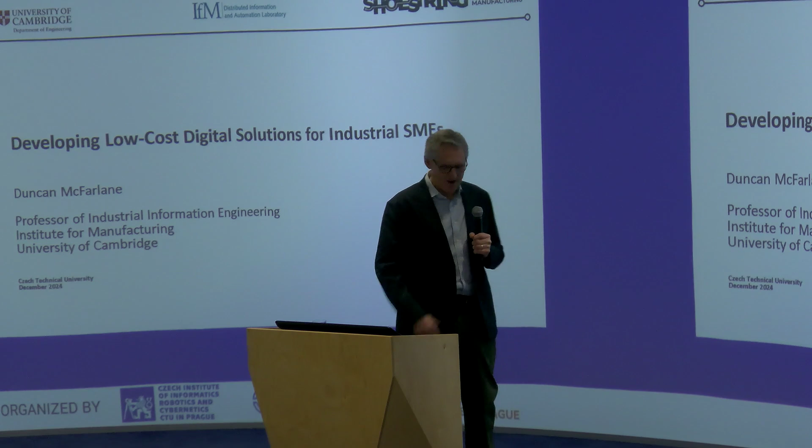So I need to use this, do I? Okay, right. Because I have a very loud voice anyway, but anyway, I would do this. In case I break it, I want to sing some songs later on anyway.

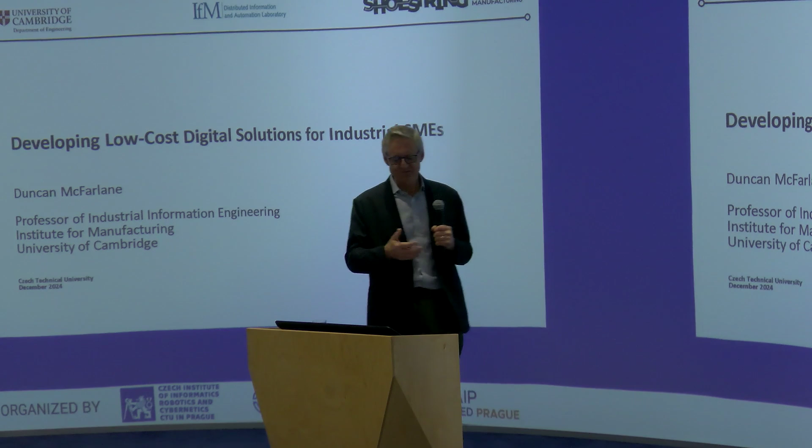So thank you very much, Vlad, and I should say I've really enjoyed my visit, and thank you to everyone that I spent time with yesterday. It was really great to see the facility that's developed. Fantastic. And as Vlad said, we've had connections for a long time now, so it's really good to be here after quite a big gap.

So today I'm going to be talking about something a little bit different to what we've been discussing in the last 2 days, and it's some work that I've been involved in since 2017, particularly, as it says here, looking at the issues and challenges that very small companies face in trying to become a bit more digital than they are already. The first thing to say is there have been a lot of people involved in this work, and I should say it's called Digital Manufacturing on a Shoestring, the kind of catch title.

Maybe 30 or 40 people over the last 7 or 8 years have been involved one way or another, so I acknowledge their inputs. This is really just a summary of that. So what I'm going to do is talk a little bit about the background to the small companies and some of the ideas behind what we mean by low-cost digital solutions.

And then I'm going to focus on 3 key things we've had to work on. One is helping organizations to specify solutions. The second is how to design low-cost solutions systematically, and then how to deploy them cheaply. And then I'll wrap up. In theory, this is about a 45-minute talk. Sometimes I go a little bit longer, and I'm sorry.

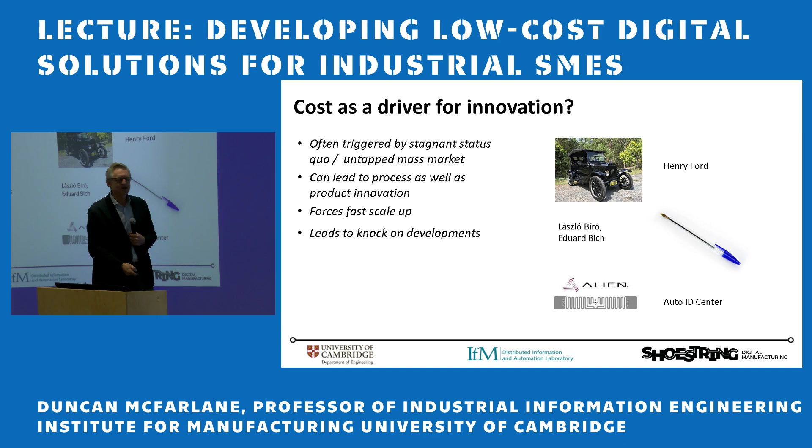I'm not talking about any of those today. I'm talking about low-cost industrial solutions.

This project, or this whole activity, began with a student who came to see me in 2017. He said, I have a 6-week project, I want to solve the world's food waste problems. I said, so often in Cambridge our students have quite big ambitions, maybe you can't do that in 6 weeks. He said, also, I want to come up with a smart fridge. I kind of laughed.

But we were working with Tesco at the time, a big supermarket chain in the UK, and the student said, I want to have a go. In 6 weeks he nearly built a smart fridge. He took the GoPro camera off his bike helmet, got a Raspberry Pi microcomputer from a friend, took some software from an MIT website, and got some wiring and sensors from our lab. His aim was to monitor the level of milk in the milk bottle and some other contents as well.

I thought this project should be a 2-year project—that was the way we did it then—so I was quite shocked. He didn't finish it exactly, but the next month he came back and finished it.

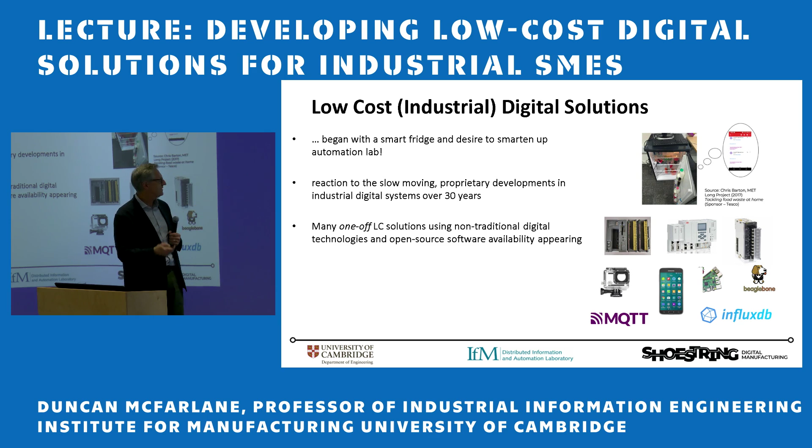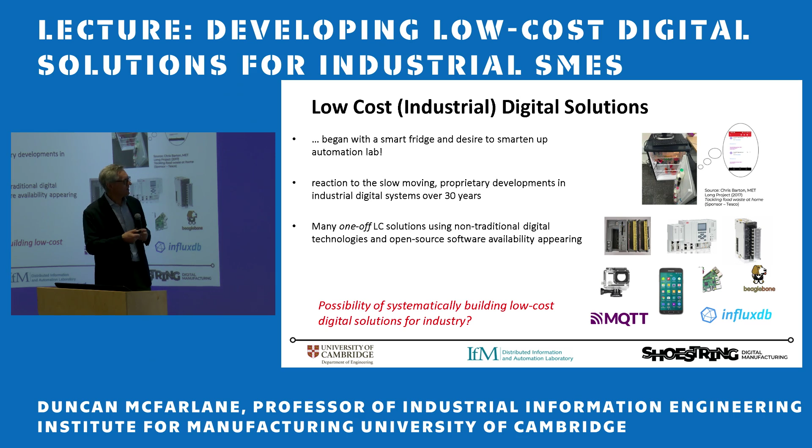This was back in the mid-2010s, which was also when Industry 4 was evolving. So we started to think about whether we could take these sorts of ideas but take a more systematic approach to build low-cost solutions for industry in some ways. That was the first thing we looked at.

The second thing that happened was Industry 4. I went to a lot of industrial workshops in the UK and in Australasia. I had a very interesting workshop once in Melbourne where I was looking at a really impressive proposal from Siemens for a top-to-bottom IT infrastructure. The guy standing next to me—I asked, is this interesting, are you a manufacturer? He said, I am.

Is this interesting for you? He said it could be, but I can tell you I'll never have it because it's too expensive and it's a big solution and my company has small problems. It turned out his company had 30 or 40 people. They wanted to do digital deployments, but some of the offerings that were coming through just didn't match what they needed.

Depending on where you are, in Europe 250 is the limit for SMEs, in North America it's 500. But here's the really interesting fact: most manufacturers in the world, 99%, are SMEs, no matter how you measure it. There are about 368 million SMEs in the world, and the estimate is maybe 30 to 40 million of those are manufacturing SMEs. So that's a lot of companies.

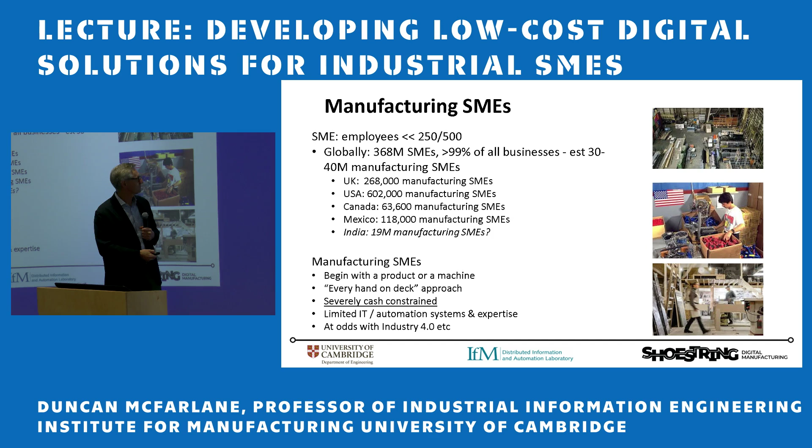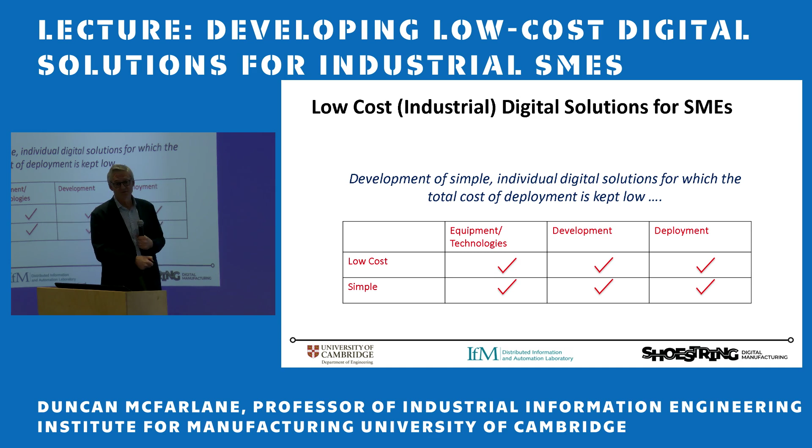So when we started to think about what we could do with small companies, the message we got very clearly was: we're interested as long as you build simple, low-cost solutions for which the whole cost for us is very low. And that didn't just mean the equipment, but the development and the deployment too. So everything had to be kept low - that was our challenge point.

In the first part of our project, back when it began in 2018, we started talking in more detail to small companies, and maybe within the first year we talked in one way or another to about 300 or 400 small companies. Not only did they have not much money, when you asked, do you want to be digital, they said yes, but we have to do it for the problems we've got, not for what you're trying to give us. They didn't know what solutions were available for their problems. They didn't have the capabilities to understand the solutions. They didn't have dedicated time, and they were really worried about key staff leaving in the future. That was a big challenge.

So we had to put together an approach that not only technically developed solutions, but actually did a lot more. I'm going to talk about the whole problem, not just the technical part, in the next sections - in three parts: requirements, design, and deployment. So not only do we have to design, but how do we effectively deploy the solutions?

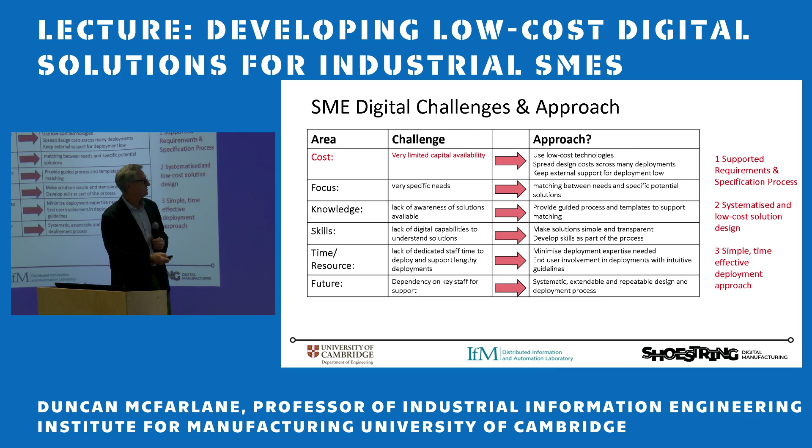Before I go into that detail, I just want to mention this shoestring project. Sorry, am I blocking your view? No, I'm not. Okay, is this the best place to stand? Maybe in the middle - that way I've got the column here.

Okay, perfect. So we came up with this idea called Shoestring. Anyone that's as old as me - and not many of you are, maybe Vlad is as old as me - there used to be something called a Shoestring travel guide to travel in Europe, and it told you how to be very cheap but still have a good time traveling around Europe.

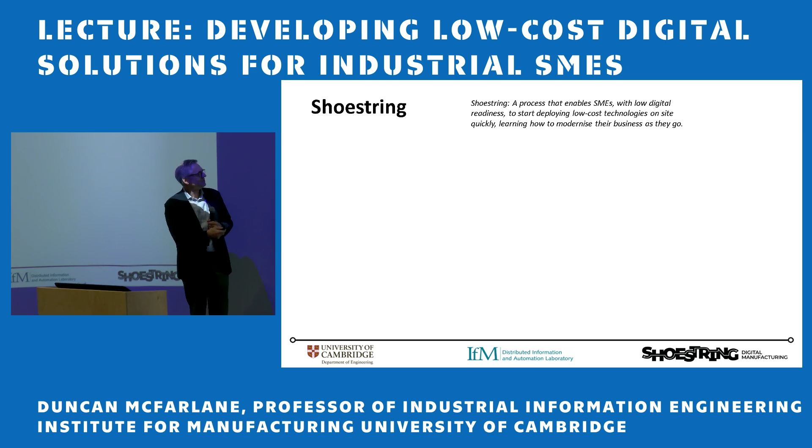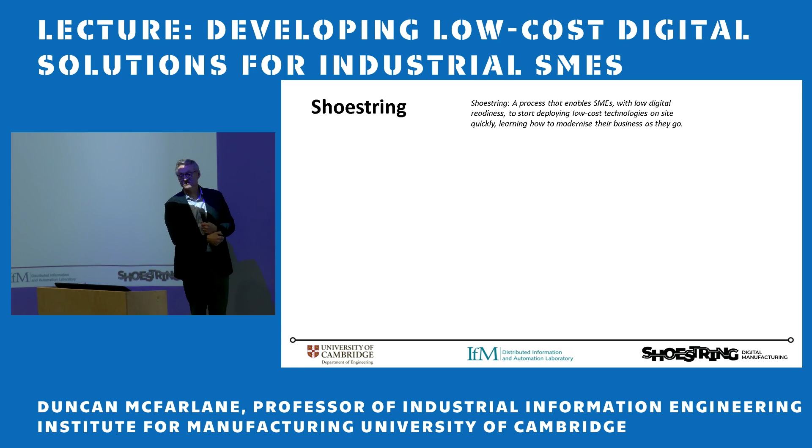And so we used that as our title. It was the shoestring. Shoestring is a process, not a solution. It's a process that generates solutions for integrating low-cost technologies to address the needs of small companies.

We began it with a research project, and that ran for 3 years, 3.5 years. It ran all the way through COVID, which is important. During that project, we had 50 partners, and they said, well, what happens when this project ends? We thought we would have 2 test beds, but we ended up with 20 trials in companies.

So we needed a system to take these outputs, which was these low-cost solutions, a simple architecture, but also ways of helping companies understand their needs and training the companies. And we built that into a business activity.

So we have within the Institute for Manufacturing in Cambridge a business unit that manages not only our research programs, but also we run regional programs in different parts of the world, advises small companies, and also works with apprentice and training organisations. So that's what the shoestring program has done.

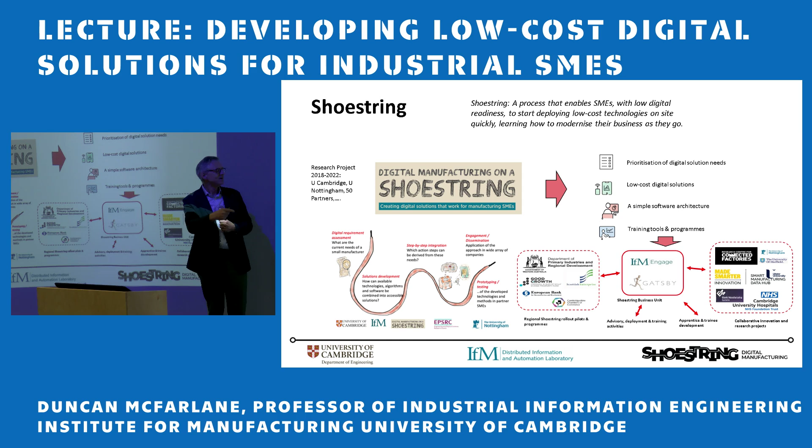I'll come back to where we've got to at the very end, but I'm now going to go into the processes we've used. Firstly, the companies we talked to said, well, we kind of know what our needs or issues are. We don't know how digital solutions address them.

If I go back to that chart I put up before, the items in red were really the key things we had to achieve in the needs and specification area before we could even begin to design a solution, because we began not knowing what small companies needed. We thought we did, but we were kind of wrong and right.

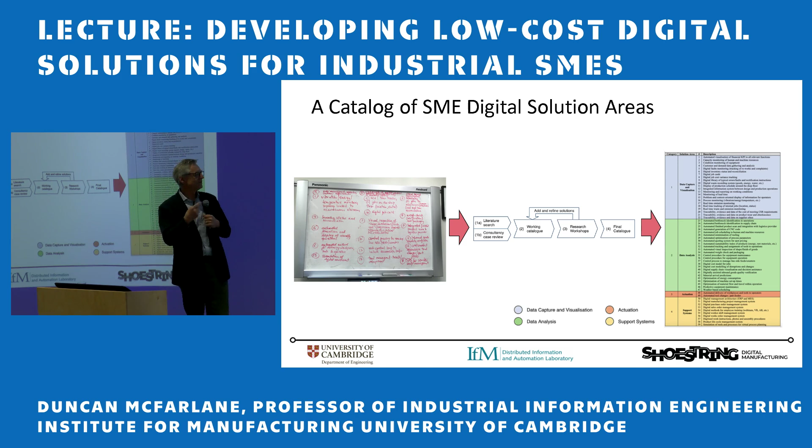And in the end, we came up with what we called a catalogue, which identified the top 40 to 50 solutions that all small companies asked for over and over again. We did this through a series of workshops which we ran across the first year of our program. That catalogue included some solutions that we didn't believe were suitable for low cost.

So on the right-hand side there, all the many things - if you want something that will run 24 hours a day on a safety critical process and needs to be fully automated, then don't try to do it with a low-cost solution. I think we all know that.

So on the other hand, what we found is many of the solutions in that catalogue were actually compatible with using some low-cost technologies, mainly because it didn't matter if it failed from time to time. It allowed a company to get started on trying some digital ideas.

So for example, I'll just show you a quick video of one of the companies that got involved. What's interesting in what he says is many companies had one machine that was really well automated, but all around that machine, there was manual processes. So a lot of the shoestring work began focusing on the manual processes around the main production operations.

Within our business, it's really important to look at manufacturing digitalisation because there's only so far you can go in reducing machining times and process times, and it's a lot of these periphery events before and after where we can show some greater gains and maintain a leading edge on cost effectiveness within businesses.

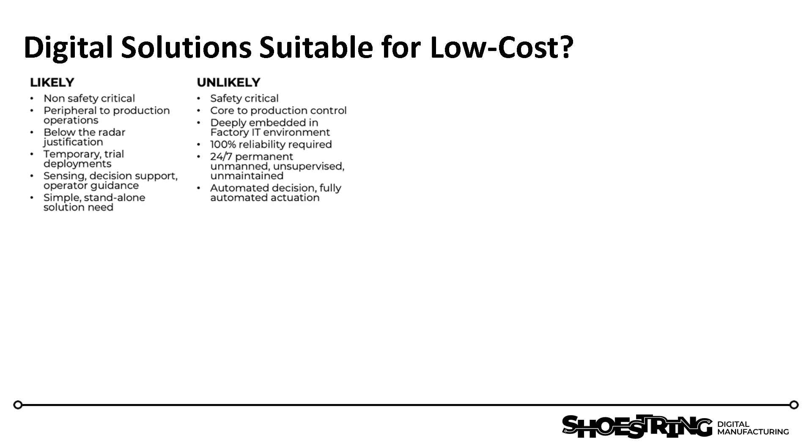A lot of... I'm going to leave. So yeah, so I mean, you get that message.

He was one of the initial partners in the program, and what they were after was to try a whole lot of things in their manufacturing environment around their production systems that they hadn't had a chance to try before because the solutions were too expensive.

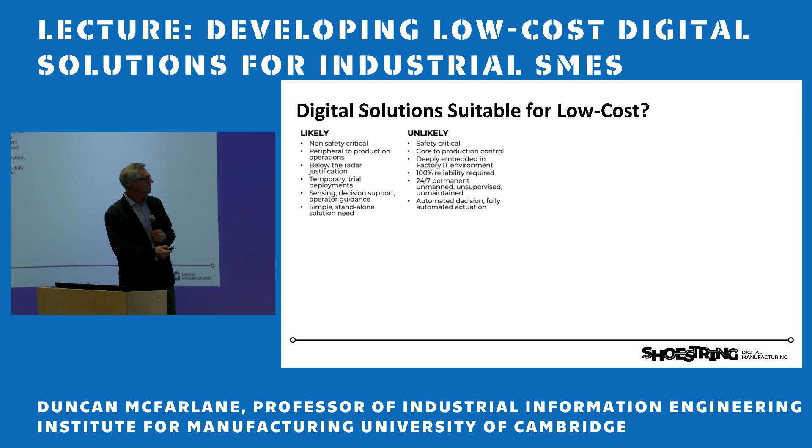We had many companies saying we have data systems around our factory that we have to go and manually check all the time, like a light stack. We have these lights that say red when the machine is not operating, green when it is operating, but we don't have any digital record of that. So the solution there was to point a camera and just look at the colour of the lights.

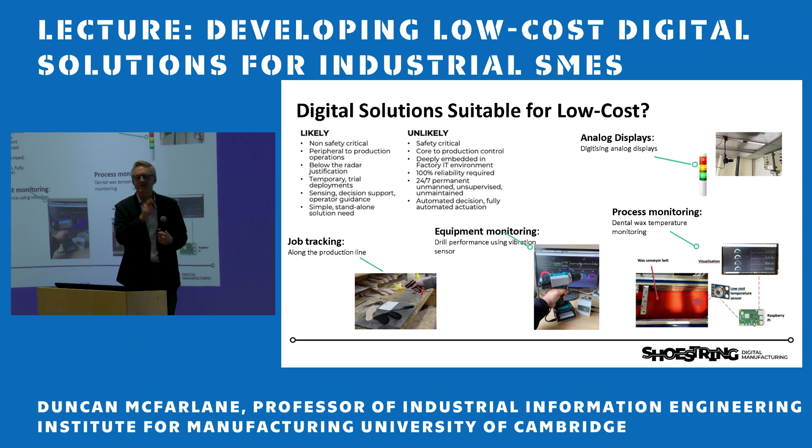The second thing companies talked about was that they have to build business cases. Our boss says you need to talk about a business case for making any investment, and we knew that is often a prohibitive issue for a small company.

So we developed a really simple approach which basically identified basic benefit areas possible, and in a short workshop of about 15 to 20 minutes with the company, identified where they were going to get benefits. They would use that instead of a business case in their process.

We then went back later and did some auditing of that process. What we generally found is any benefit they identified, they got, but there were also many others that they observed and didn't actually anticipate. This is very typical for most digital solutions actually—there are many more benefits than those that are actually quantified at the beginning.

In fact, we've done quite a lot of work on something called value of information, some of our more academic work connected to this, and we've come up with methodologies you can broadly use for coming up with a value in terms of impact on the business of digital solutions.

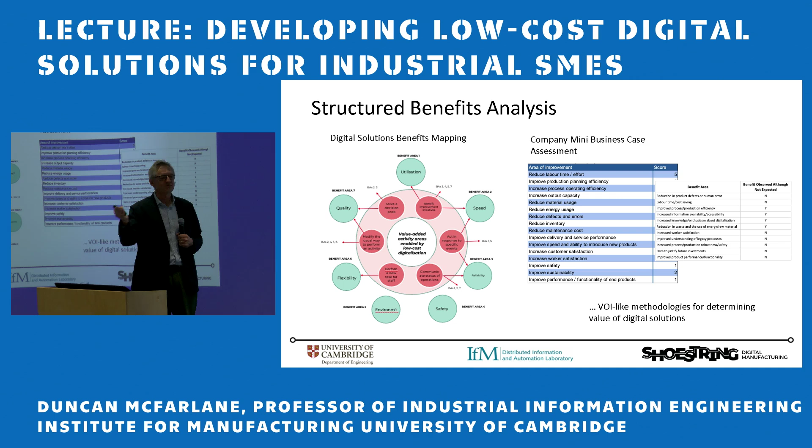Finally, one of the key things we found is that many small companies have people that understand their processes really well, but understand digital systems very poorly. And yet what we needed was to help them build a solution that is going to work.

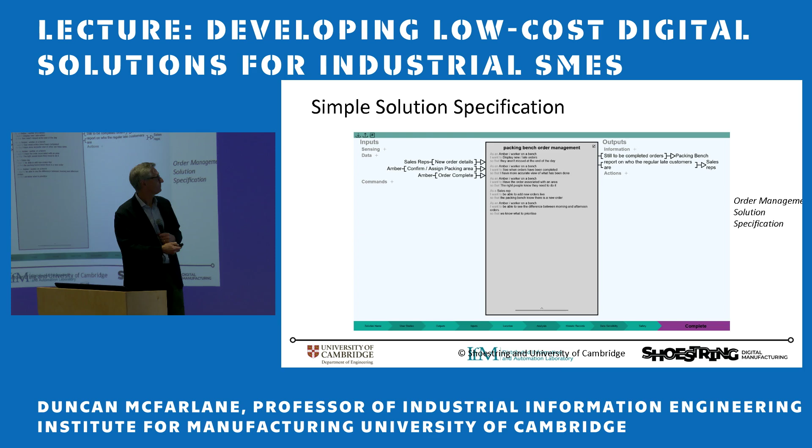So we developed a simple methodology for capturing their verbal requirements in a specification structure. This structured specification is designed so that it can be relatively simply turned into a technical spec.

So that gives you a sense of the way we had to build a structured support for a small company. Note, I haven't talked about any solution development yet—this was everything that needed to be done to help a small company get to the point of identifying what solution they needed. Quite heavy work, actually.

But we've now reduced this down to a 1 to 2 hour session with the company, and we're moving to a point where companies will be able to do it themselves, or perhaps with a local facilitator—shortlisting the solutions they're interested in, prioritising the ones that will have the best benefit, identifying the features for their solution, and then building this formalised specification.

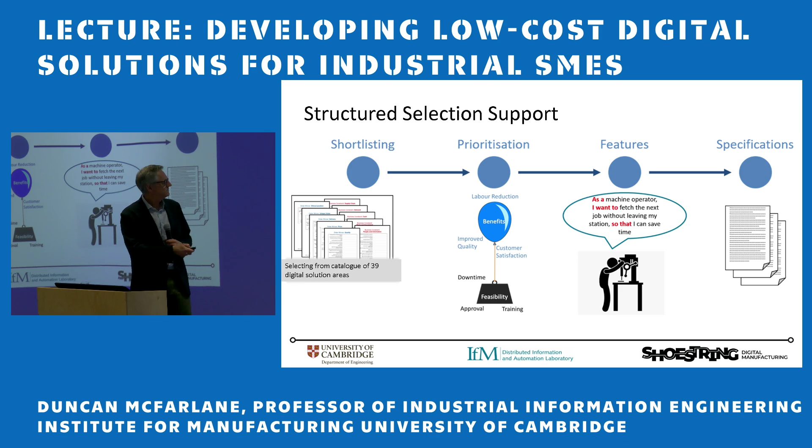That leads to the next part, which is, once we know the solution, how do we design a systematic low-cost digital solution for a company? Cost has been a dominant challenge all the way through this. So here, if I go back to the original set of company challenges, this is about how do we use low-cost technologies, how do we make solutions simple and transparent, because people said, I want to understand what you're doing, and there's a reason for that when we get to deployments. We wanted to involve the end users in the deployment, and it needed to be systematic, extendable, and repeatable. So I'll talk about that next.

So way back early on in the process, having come from many years of working with modular reconfigurable systems, I proposed a solution architecture for these low-cost solutions. And the logic behind it was something like this.

We have all off-the-shelf low-cost technologies, and although we can identify them at any given time, they're always changing. So for example, Raspberry Pi, who we work very closely with, they bring out a new model every week, and I think they're aiming to do more. So how do we keep pace with this?

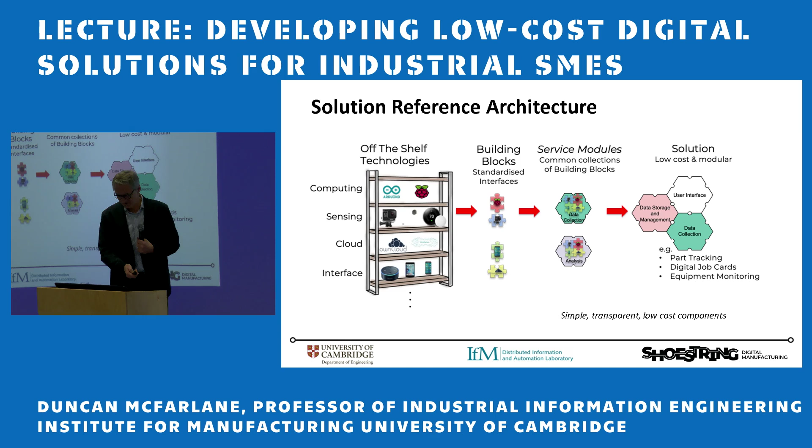And in fact, we more or less have kept with that architecture since the beginning. One of the reasons for keeping with it is that we also did a survey of different architectures available for building individual digital solutions. We're all familiar with many, many papers on reference architectures for manufacturing systems. We reviewed, I think, 80 of them and found that there were only 3 to 4 that actually addressed the building of one solution as opposed to the enterprise operations.

I won't go into great details, but we did a quite extensive study with 3 candidates: an early Holonic one, conceptual architecture using the Erlang programming language, and Web of Things, which is an emerging approach to web-based object integration. We weren't aiming to prove that shoestring architecture was a great architecture, but simply that against some other candidates, it performed fine.

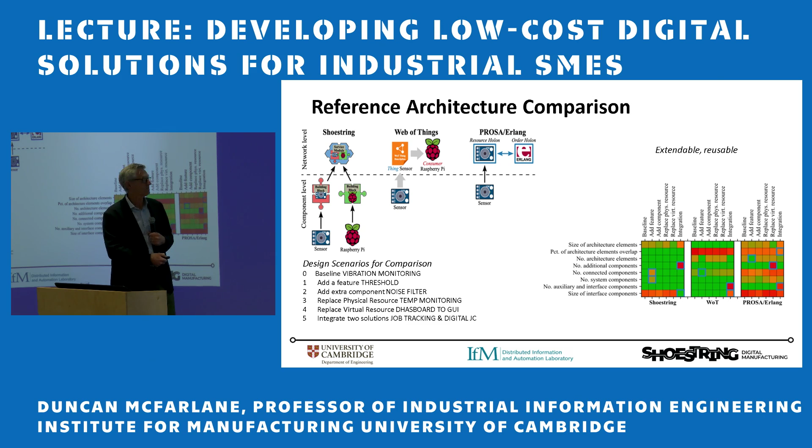And these candidates, it wasn't a particularly fair comparison. These weren't particularly designed to deal with the low-cost challenges the shoestring deals with. But anyway, in that analysis, shoestring came out with good results in doing many extensions and reuse and integration tasks. So we feel kind of comfortable that we've got an architecture that is sensible.

We then put together a design approach. And our idea with this design approach, as you'll see at the end, was that in the future we don't want to be building the designs ourselves. Someone else will do them, or they'll be done automatically.

This is familiar, I think many people familiar with digital systems design will understand the V-curve. So specifications down the left-hand side, and then building and construction up the right-hand side. And in the middle for us, a key issue that is not always an issue elsewhere, is we always need to identify the right base technologies at the time, the lowest cost options.

So to make this systematic, we've built a series of catalogues that I talked about earlier and templates for doing designs so that other people can be doing these designs as easily as we do. One of the things we're working on right now, and generative AI has made a lot easier, is a low-cost technology classification method.

So the way it works, and I'll go through it quite quickly, is that we start with that user specification, and we have a methodology for turning that into a more standardized solution specification method. So we capture typical things like information sources, outputs, which data we need to make use of, which physical operations do we need to interface to, and sometimes not at all.

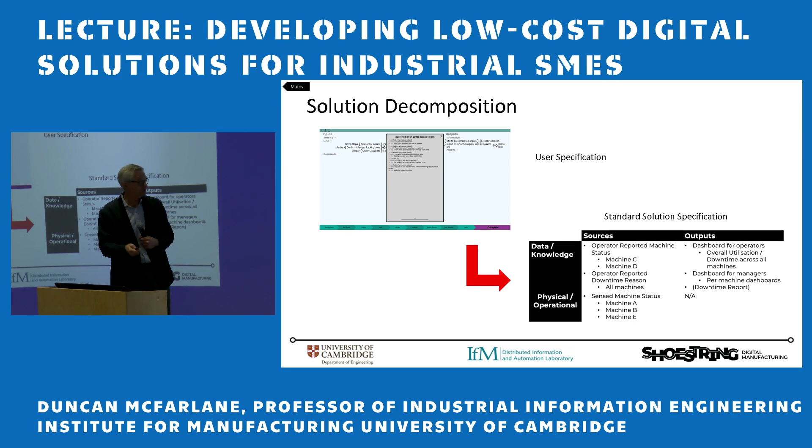And then we decompose that into the service modules I talked about before. Actually what we found is that if you think about everything we do in a digital system, it normally comes down to one of 7 types of operations: gathering, sensing, analysing, recording and storing, deciding, reporting and actuation. So whereas we began thinking we might need to develop many service modules, in fact we found that with 7 basic templates, we can build any solution.

I don't think that's revolutionary. That's quite obvious when you look at the names. And we do have variations within those different service modules, but every solution we've built so far has been built with just these 7 elements.

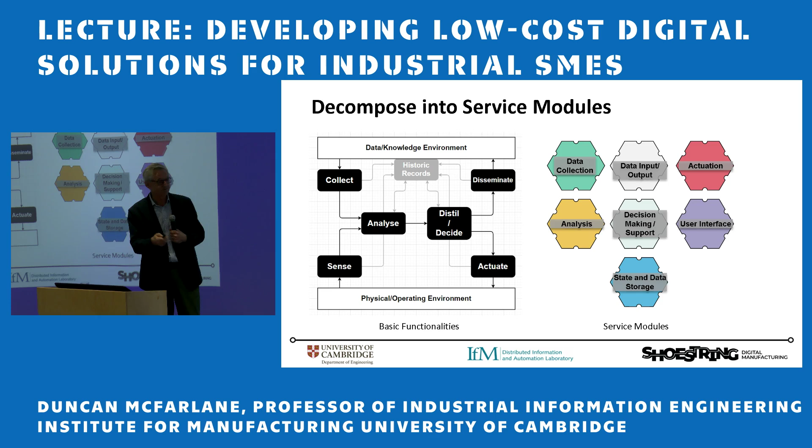So within those service modules, they obviously have to get decomposed into building blocks. And the building blocks would either be hardware building blocks or software building blocks, and in fact, sometimes hybrid building blocks where we have a mixture of hardware and software. But I was talking to people about standardizing interfaces yesterday in some of our discussions.

And this is what we're trying to do here, is to come up with a limited set of power, signal, comms interfaces in hardware, and then communication protocols, message structures, data formats, etc., and ontological organisation for data, in order that if we have our building blocks complying with these specifications, these interface standards, we can always connect them together.

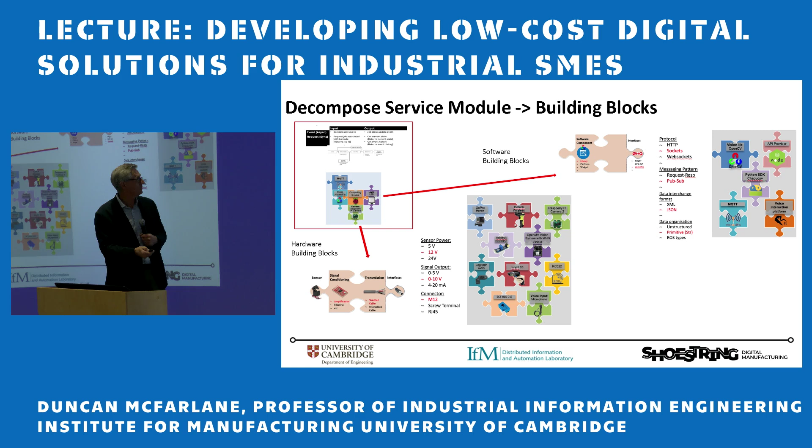So we're making some progress there. It's still, we're certainly still not there with the building blocks. This is the hardest bit. Our service modules are quite mature, but these still need some more work.

And then, as I mentioned, one of the current things we're looking at a lot more now, we began 5 years ago, and it was almost impossible. We were trying to understand how to explore available information sources to classify types of building blocks, or types of technologies that supported our building blocks. I'm sorry, this is not easy to read.

So, we've got our actuation elements there, our sensing elements here, our user interface elements, etc. Actually, they're listed, all listed along the side here. So these are our classifications of the building block types and the type of technologies that we might want to use inside them. This is not a comprehensive list, but this captures some of the early stuff we were starting to build.

And you can zoom in and just see the data collection elements there. So vision systems, sensing systems, etc. Much bigger lists available now.

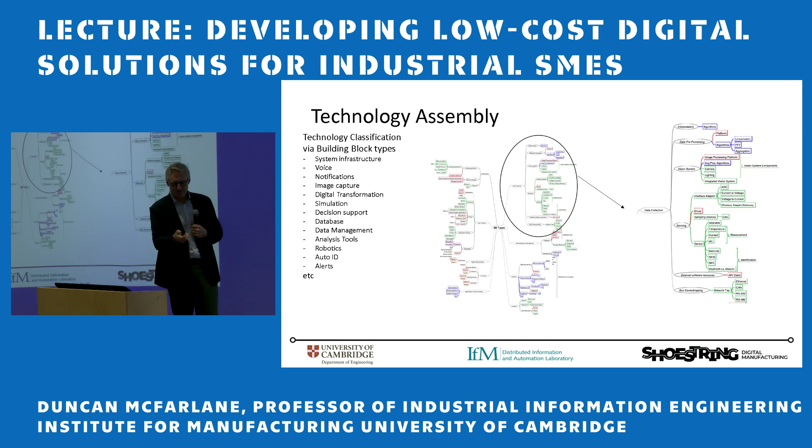So once with the base technologies, we then build our building blocks and integrate those building blocks within these service modules, and then finally aggregate the service modules to form a solution.

So this is an instance. In fact, if I have time, I'll show you a short video of this system. Perhaps I won't have time, actually. But one of the early developments we did was with a company that made dental wax.

They had no automated system for gathering temperature measurement, which meant that they had to walk around and check temperatures of their dental wax all the time, which was critical if you were going to make a mould of someone's teeth.

Anyway, that solution was developed during COVID, so we never went there. We did it all over the phone, and they actually did the deployment themselves.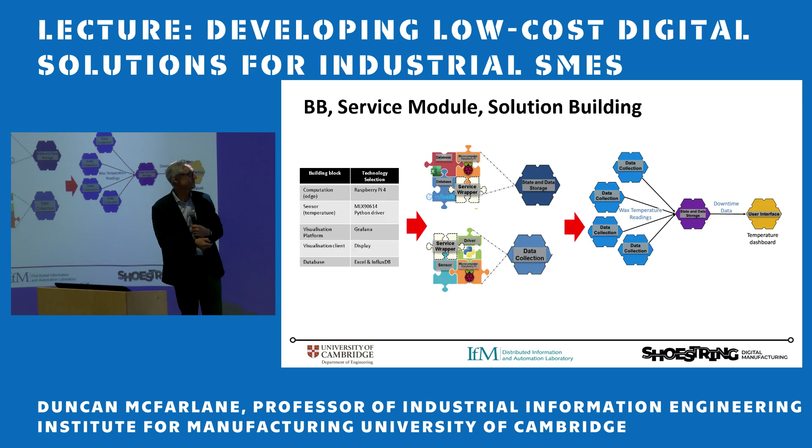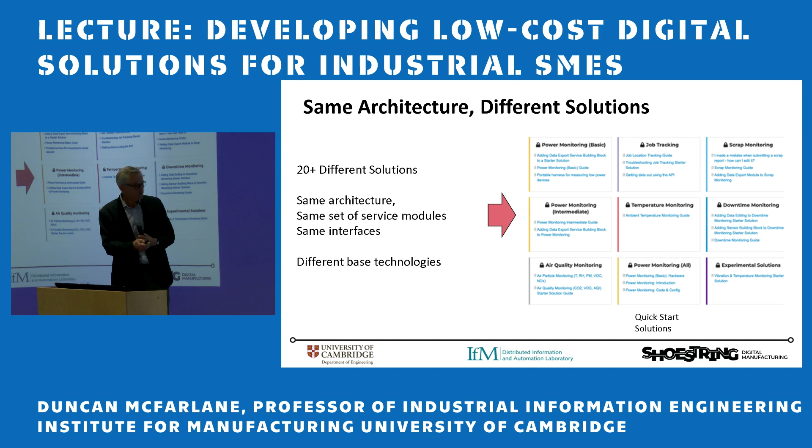So where we've got to is we've developed this architecture, and we've developed 20 different solution types, lots of variants within those, using the same architecture, the same service modules, and the same interfaces, but in many cases, different base technologies. On our website, we're actually selling simple solutions for some of the most commonly requested problems, like job tracking I mentioned before, temperature monitoring, monitoring scrap levels, downtime monitoring on equipment, power monitoring. So these have all been built with the same solution architecture.

And where the design work is going now, as you might have guessed, is how do we do this in an entirely automated manner, or at least in a manner that someone with no expertise can build their own solution, just simply by moving jigsaw pieces around. And this is an extract from some work we did using a package called Blockly for automating the code generation for the building blocks.

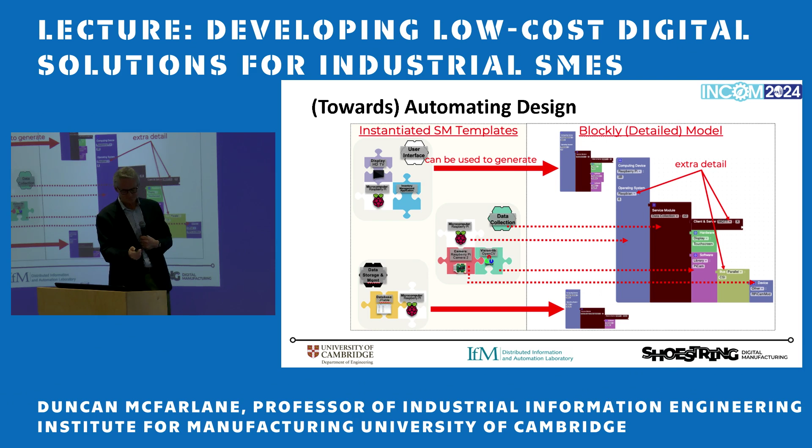So that's a quick description of the design process. The final element, though, is that once we built the designs, we realised if you want to keep it very low cost, you can't afford to spend much time with a company doing a deployment. Perhaps you can afford 1 hour of expert time helping the company deploy. If you think about how many solutions need more than 1 hour, you can see that's quite a big challenge. So we've done a lot of things to try to reduce the amount of effort and improve the local support available for developing.

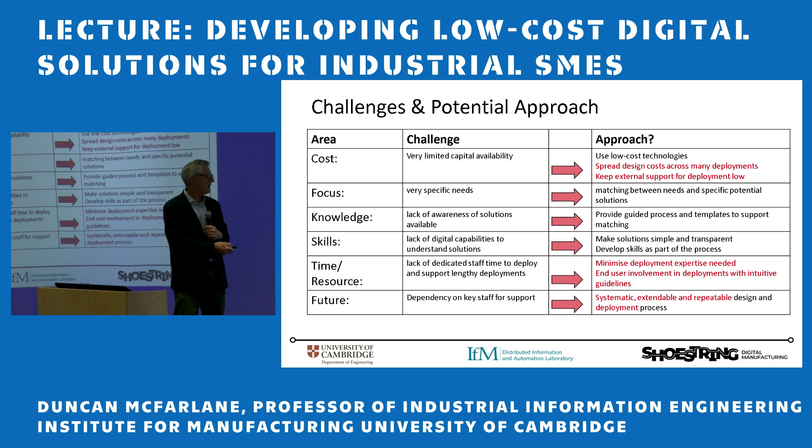This is about some of these issues. To keep the price down, we need to spread the cost of designs across many deployments. We want to keep the support low, minimise expertise use, and—this was really interesting—get the end users involved in building their own solutions, which turns out to address another major issue small companies have: skill development. And make the solution systematic and extendable.

So what that said to us was, we may not be able to solve every small company's needs, but if you could build the top 15 and find an easy way to deploy them, you could be solving many small companies' needs. That's the difference—we had to get away from the idea of solving every small company's personal problems, and instead find the problems that most small companies have. We've now involved probably more than 500 companies in understanding these priorities.

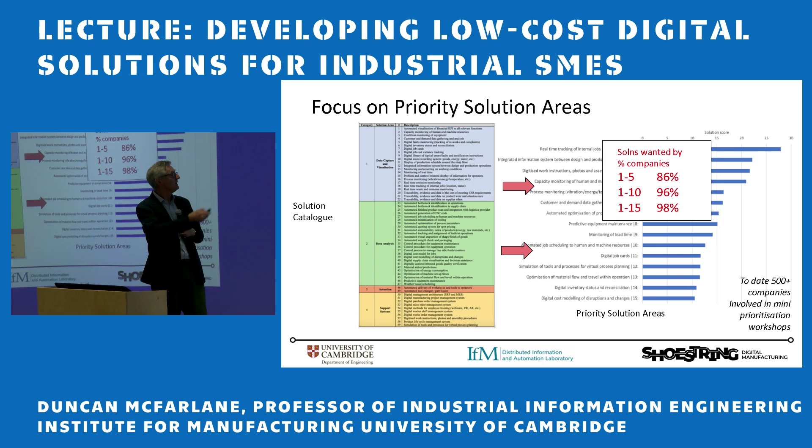So one of the things we realised is that we had to come up with ways to help companies deploy solutions themselves, without having to be on the phone or in the factory. We had to develop a systematic deployment process. We built a community forum. We built guidelines for self-start programs so companies could get themselves going, and they could actually get a mentor and work in a group to do that collectively.

As I mentioned before, we also built really simple starter solutions—you could get a kit sent to you in the mail, follow 10 steps, and have the solution running. Clearly we're not automating a big production process, but for something like scrap monitoring, you could set up your own solution and have it running quite quickly.

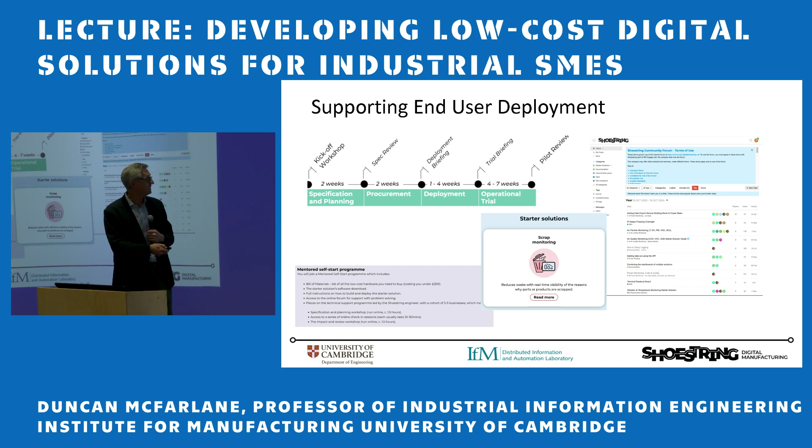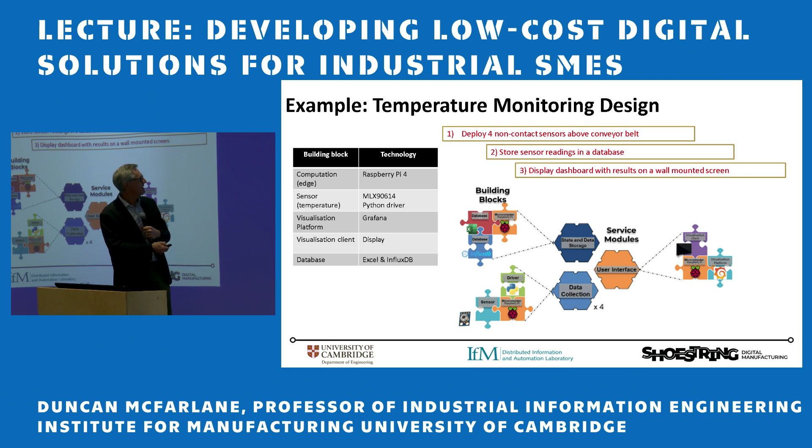I'm going to jump across to this example of the temperature monitoring system. With that system, the production supervisor in the factory deployed it, and we simply provided support over the phone. The production manager was the guy who rang us to start with and asked if we could help him.

So actually, we were still inefficient—we probably made 10 to 20 phone calls with the company, but a lot of the time now we can do the solution deployment in 2 phone calls. We'd like to get even lower. It had significant benefits for the company in the area they wanted, quality control. But also, they started using the temperature system with a simple dashboard to diagnose other problems in the factory, which they hadn't anticipated being able to do.

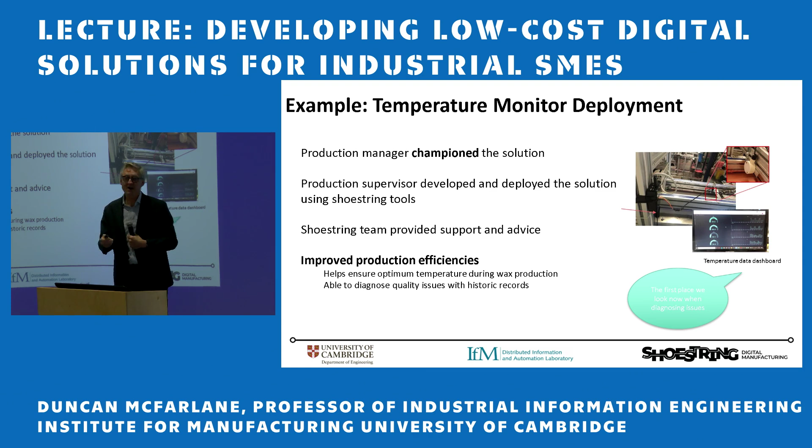So I'm going to jump that.

The other thing we did, starting in 2021, was to realise that there are many regional manufacturing associations set up to support small companies. Because it was very hard to get small companies together, we used the manufacturing associations to do it for us. The one in Scotland we were working with said they thought they could set up a shoestring program in Scotland.

So we ran a pilot with them, and we spent a lot of that pilot trying to build the right team in the region to deploy solutions. We spent time training the regional associations, finding solution providers, and got universities and technical colleges in Scotland involved as well.

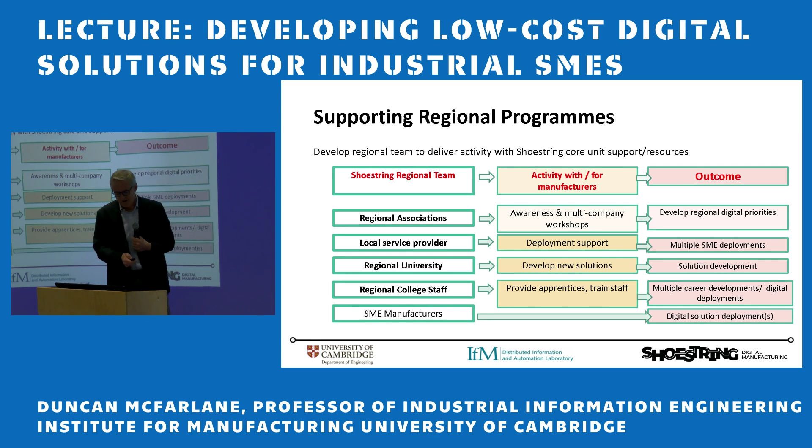Another example of development was during the back end of COVID, we had a phone call from Western Australia. They'd heard about the shoestring program and looked around the world to find a way to deal with having very small food and drink companies - wine makers, beer makers, agricultural product packagers - with no digital capabilities at all. So we set up a program with the Western Australian government, and I've just come back from being there, where we ran workshops in the wine producing region called Margaret River, south of Perth. 20 companies there are in the process of doing a shoestring pilot.

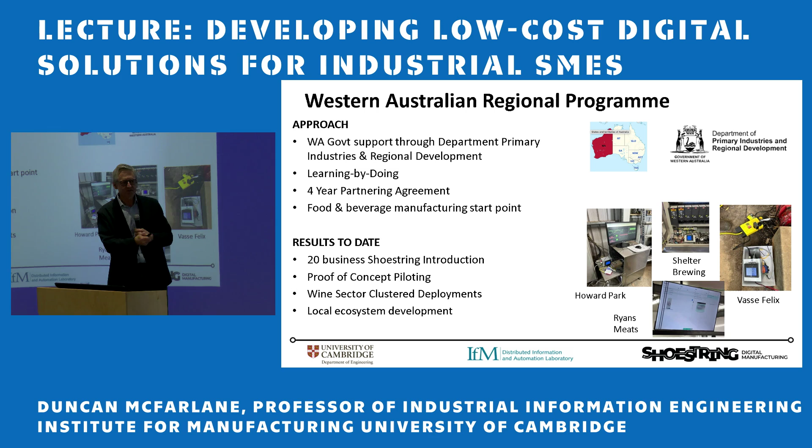So I'm going to show you a short video of some of the work that's come out of Australia in that area, I hope.

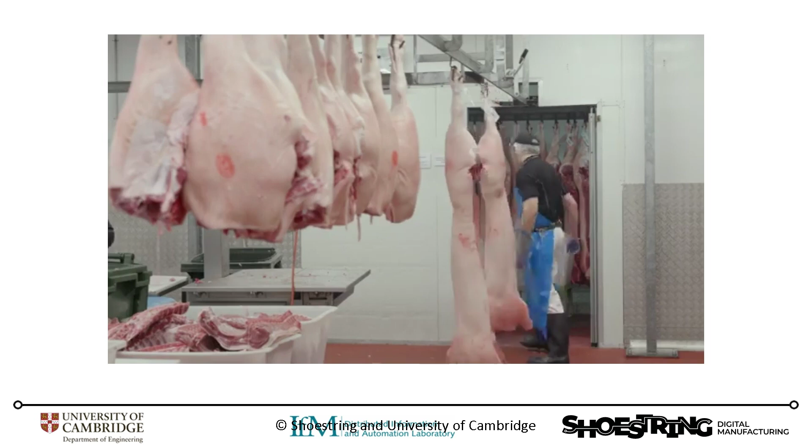Well, for us, Shoestring was a bit of a revelation in that it brought a number of people in the organisation who had nothing to do with using digital technology into a place where now people are starting to think about other applications for how we could improve our process. It's been an opportunity for us to think more laterally. Now, instead of trying to think about a solution in-house with either a butchering operation or movement of people around the place, we're thinking outside the box as to how we can implement something technology-based that could give us the same outcomes.

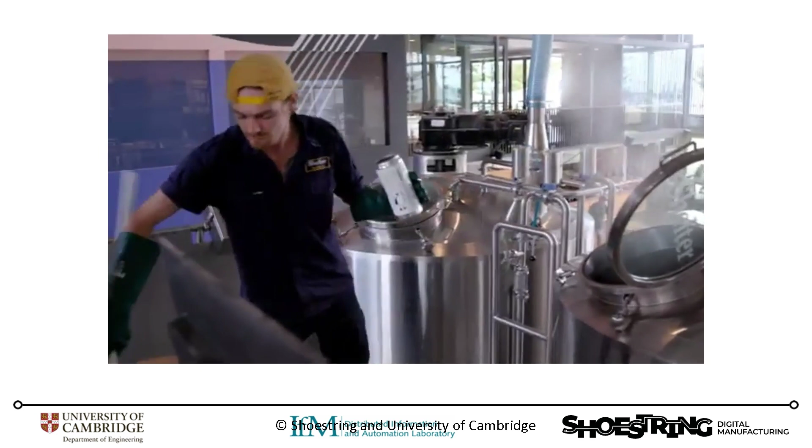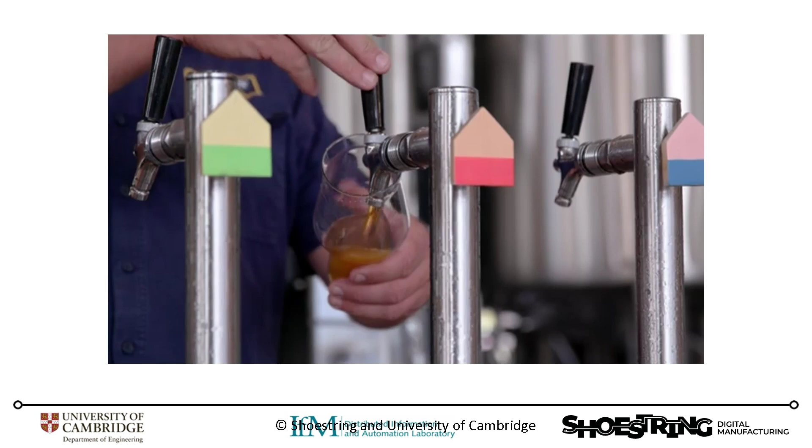Since implementing our power monitoring solution, we've been able to identify the uptime and downtime of our equipment, and we're starting to get good results identifying a baseline power usage for those items of equipment. We'll shift it around through the brew system until we've got good baseline readings. Once we've got those readings, we'll be able to target items for upgrade from a sustainability point of view, identify items using too much power, and potentially change our process to better utilise that equipment. The efficiencies this will bring in the long term are reduced power usage and consumption savings, plus improved efficiency and production output by better utilising our equipment.

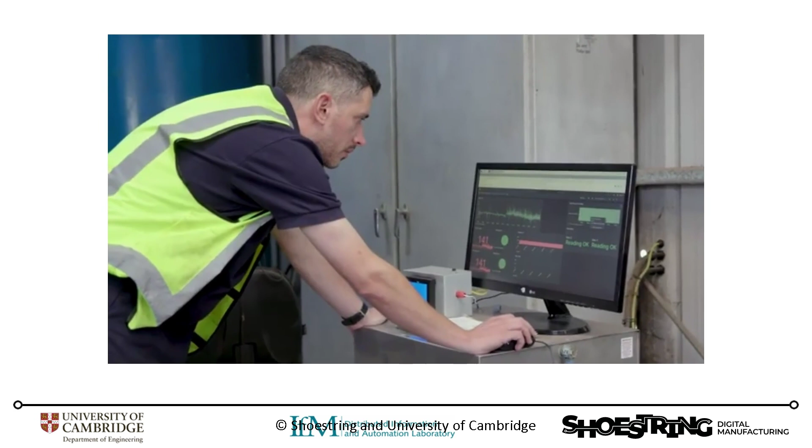So we pinpointed a couple of areas where we could use these shoestring solutions. One was a simple power monitoring control. We are working a lot on our carbon emissions, and that was a good starting point. With this simple power monitor solution, we can attach a small clamp to different big machinery that we utilize here, and we wanted to monitor how much power we consume, especially during the busy vintage period.

So in that brief video, the three people speaking were the factory director of the meat company, the finance manager of a brewery, and the winemaker of a wine company - not technical experts, but the people doing the deployment. What you can see is they're trying an idea out, and maybe in the future they'll swap the shoestring solution for a more permanent one. But up to this point, they had no base case to understand to what extent that data might actually help improve their business. These are nice examples of small companies - I think the meat company has 40 people.

The brewery has 8 or 10 people, and the winery has 12. They have other people in the vineyards, but in the actual winemaking, they make a lot of wine with very few people, and that's very typical. That gives you a sense of how the deployment process has to work, even once you've got a design in place. So I'm just going to wrap up now.

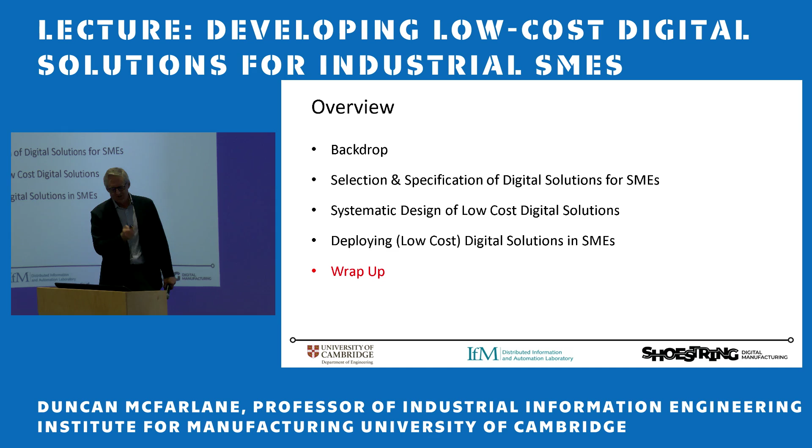Back to Shoestring - we've worked with a lot of companies. This is just a summary on a page, but I think we've now just about passed 250 solution deployments in small companies. We've done a lot of requirements workshops, understanding what companies' needs are, and the original catalogue of 59 solutions is now reduced to 39.

And from that, we've built 12 of these sort of starter solutions that we're directly giving away in kits or selling in kits. We're operating in 7 countries, etc. And also, just to mention this stuff down here, we're starting to work much more because this is the sort of thing that we can train apprentices and further education students to develop digital skills with. So we're starting to work with a lot of FE colleges in the UK and elsewhere to train their students. We're in a number of different countries, so we started.

I haven't got a map. This is the first 20 companies we worked with. I don't have a map of the 250, but these are our regional programs we're running in different parts of the world. We just ran one in Egypt earlier this year, and hopefully we'll be running in 6 other North African countries in the new year.

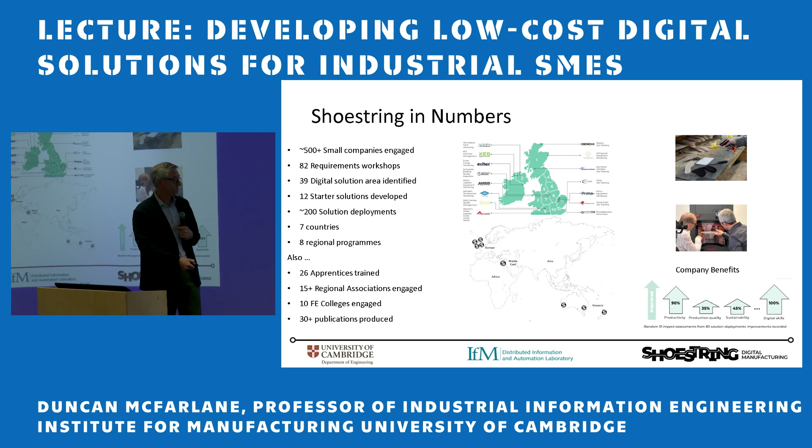Just to come back to that SME issue, this is the challenge, and Vlad and I were talking about that this morning. SMEs are the industrial long tail. They're the part of industry that's really hard to work with, because 50% of the revenue is with about 1% of the companies or less, and the rest of the revenue is much more spread. So we do hear about productivity in SMEs being a major challenge. We do hear about digitalisation being a potential solution path to that, but it is a hard process to find a way to get to these small companies. And this is the extreme case, less than one employee, so the owner is the company.

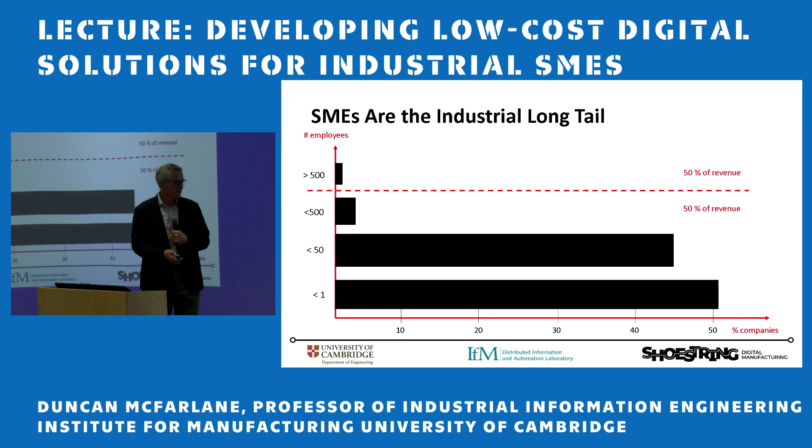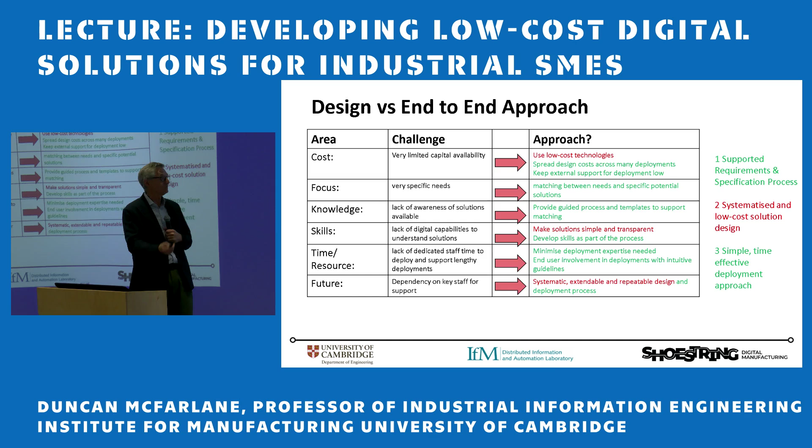So then, finally, just a comment: we thought when we began we were just doing the red area, and in fact the reality of what we've done is as much effort in the front end and the back end of getting our designs specified and deploying them. I think it's been very interesting, but much more work than we thought, and hard, even though the solutions are very simple. So that really takes me to the last point.

Vlad talked at the beginning about the sort of history of the work I've been doing, and I think this is kind of where I was. All my research historically has been around coming up with clever solutions which add functionality to existing solutions. They're challenging to deploy and required quite a lot of effort. Then we needed experts within the companies we worked with, and the benefit area was around total value, so benefit minus cost. Whereas this program has actually been in all the other areas.

So most of the work has been on coming up with a good solution process, not the solutions. Cost has been the only driver, or the main driver. Keeping it simple, finding problems that are simple and rejecting problems that are challenging is really hard. It's really hard. Actually, we don't reject them, we just pass them to start a different project, but they're not to do with Shoestring. We know we're going to be working with beginners who've got limited money. So on that note, I'll stop. Thank you very much.